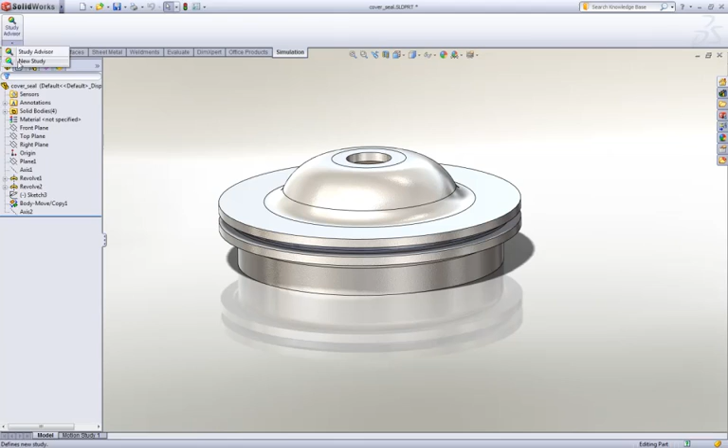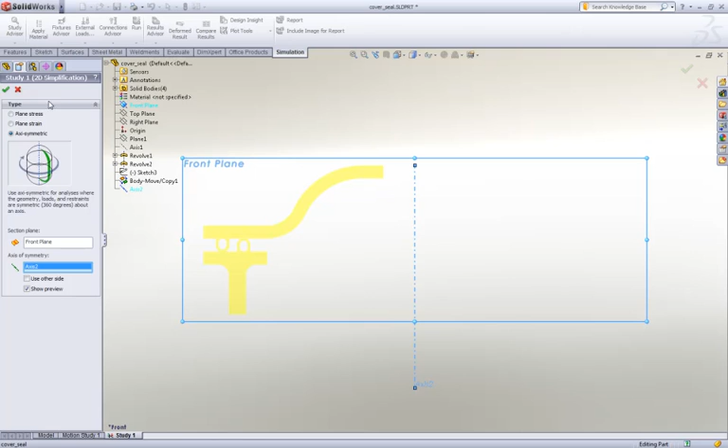Okay, for 2D simplification, there's only really a couple of things to be careful of. When you're doing the study design, one thing I recommend you do is after you pick the front plane, and we'll go axisymmetric, and then select the axis from the tree. When you start out, you'll see it's on the left hand side, it's showing the section. Leave it that way.

What you'll find is after you select that, and then if you do a Control 2 to change the view to the back view, the reason I like leaving it this way is that when you show the solid, it revolves around relative to that section. It doesn't cover it up by revolving it out of the screen. So that's the reason I do the back view instead of the front view, to look at the model on this side. Everything else here is pretty straightforward.

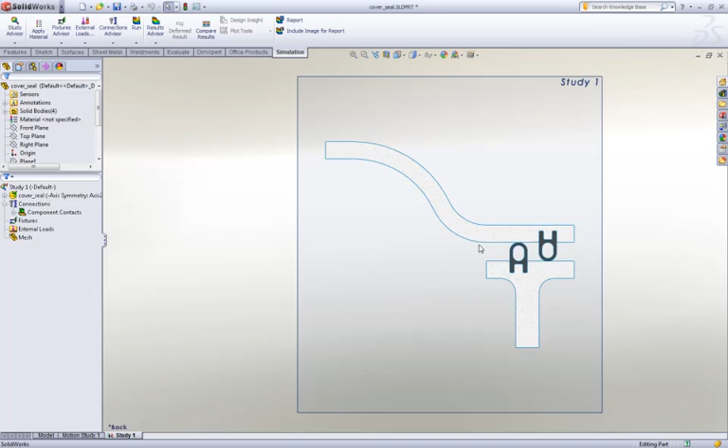It's using a default global bonded contact, so that locks in the bottoms of the seals into each component, and that's why we just add the no penetration between the top edges of the seals and the appropriate face. So that's why we do that. Other than that, this model's pretty straightforward.

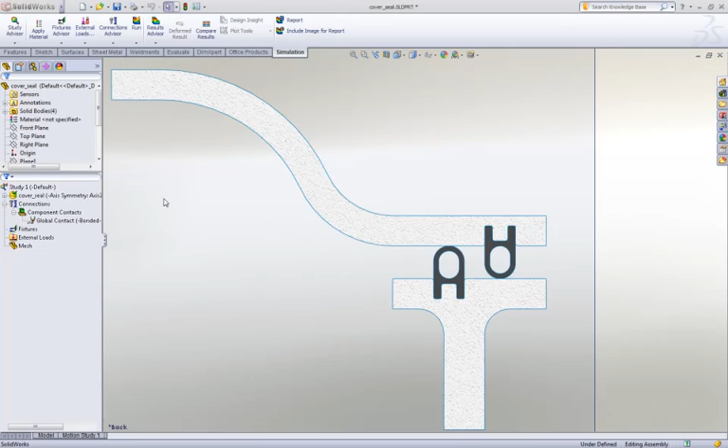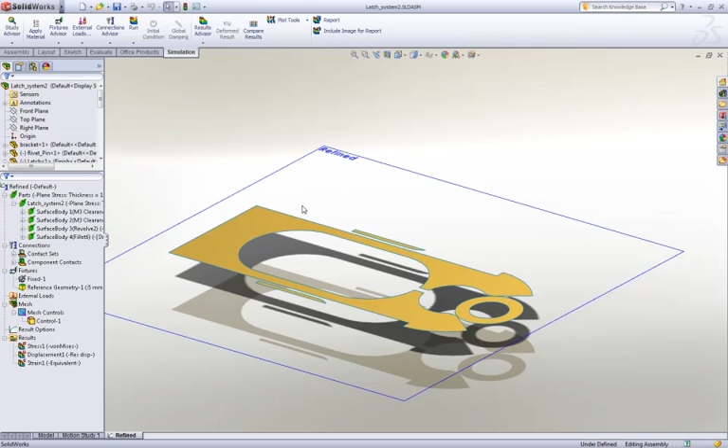Again, the parametrics is something that's key, and we might see if we can come up with an additional demo to showcase changes. I was literally using the latch to try that. It's just sometimes with non-linear, the mesh sensitivity makes it a little tricky to get that to work. But with this one, if we look at the slice, it's on the front plane. There's not much else really for this model.

The one nice thing, you'll see I've got a contact set up for no penetration between those two bodies. That's all that's there, so that's all that's needed. And all we're doing is we're enforcing a 5mm displacement to put this over onto the clip.

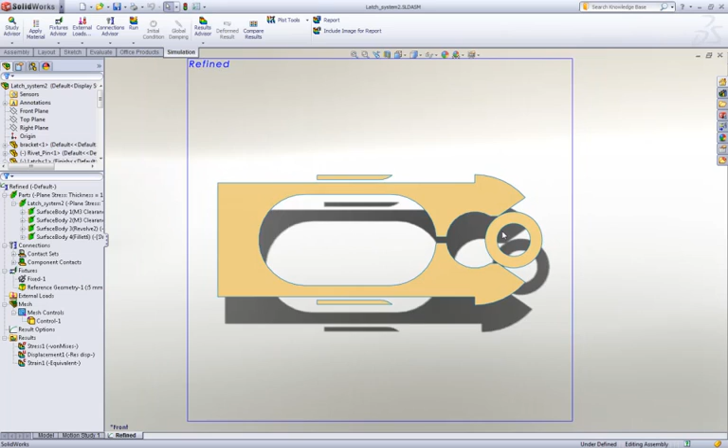Initially you had this starting outside of contact, but what would happen is this would initially penetrate, so it's sort of like it collides and you get peaks in the stresses, which I'm not really concerned about the stresses here. I was more concerned about the stresses out here. So that's why we're starting in contact and we're just pushing it over the clip.

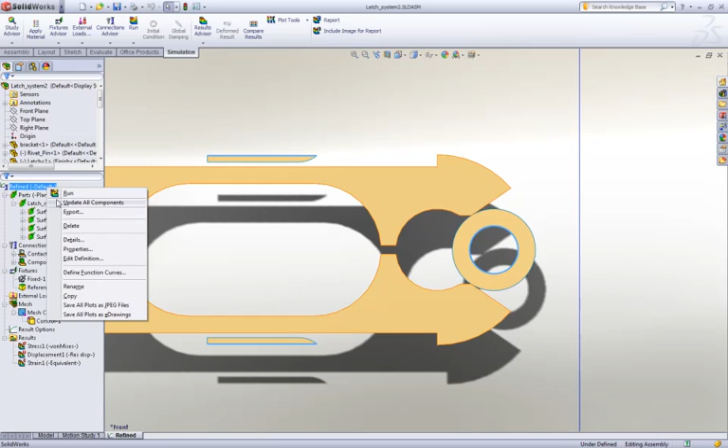Again, the thickness is important. So when we're specifying the thickness for the plane stress, we're using the thickness which is 1.625mm for the actual latch itself. That's where that number comes from, so it accurately calculates the stresses for you. That's really all there is to these models. Like I said, the solve time's pretty quick.

Even with the other model for the seal system, you could actually put a mesh control in there just on the seals using the per part size, if you want to get a really fancy looking mesh, and maybe have that one pre-saved, but create a second study to showcase the initial start if you want to as well. So pretty easy.